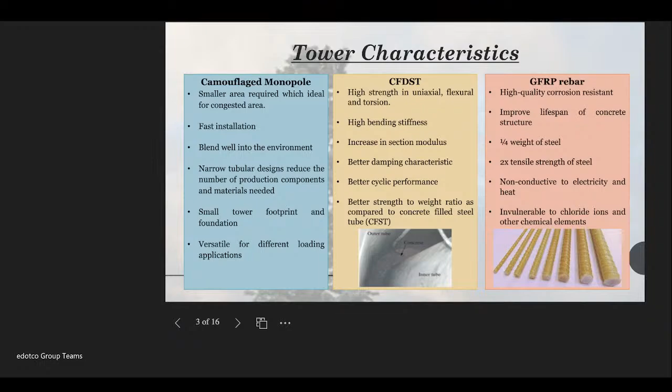Next slide, please. The camouflage monopole is able to blend well with the environment, and installation of the tower itself is easy. By using CFDST, the tower body of the monopole is able to provide high performance in terms of strength. The GFRP bars provide good resistance to corrosion, but also provide 2 times the tensile strength compared to normal steel bars, and are light in weight too.

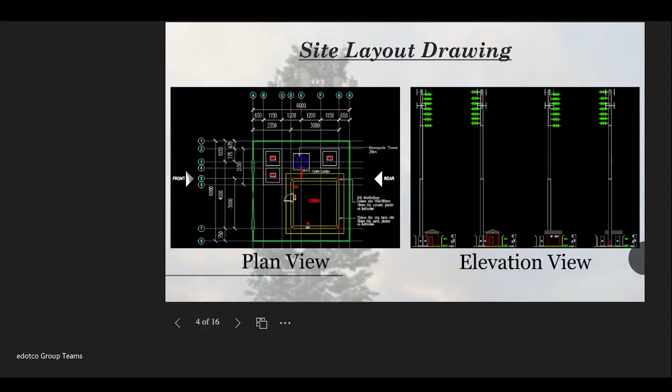Next slide, please. So as we can see here, this is the plan view and elevation views of our tower. There are the cabins, fences, and the towers. And at the elevation views, we can see that they have synthetic branches and leaf at the tower. Next slide, please. So I would like to pass my baton to Yong Liang.

Thanks, Jia Liang. Next, I will continue with gate, fencing, and cabin design. For the fencing dimension, we are using 6 meter times 6 meter with 2.6 meter height and 0.95 meter depth for the fencing footing. All the footings are designed with 2 meter spacing as shown in the figure at left bottom. For gate design, we are using swing gate with dimensions 4 meter width and 2 meter height.

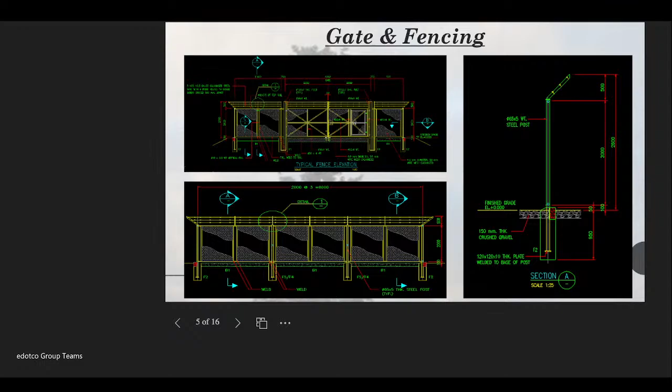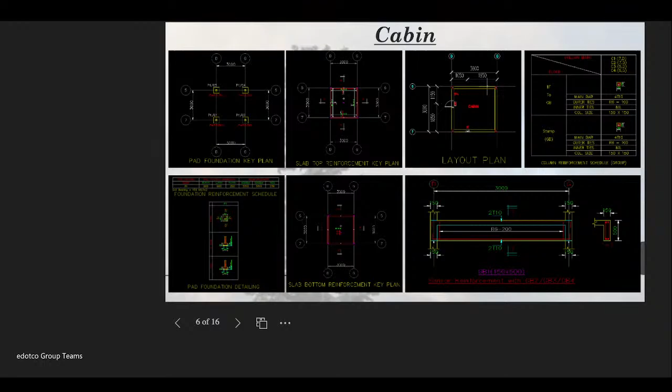Next slide, please. For our cabin design, we are using reinforced concrete design with dimensions 3 meter times 3 meter. The following figure shows the details of pad foundation, slab reinforcement, and beam reinforcement key plan. Next slide, please. In this slide, we show the 3D modeling of the cabin using Esteem and cabin roof truss model using StaadPro.

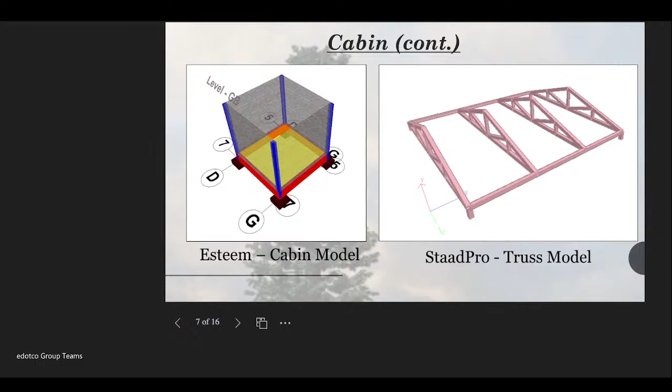Next, I shall pass my speech to Lau to continue the presentation with monopole design.

Now we will look forward into the monopole design. TIA 222G is used as our design code, and 3 CFDST sections are proposed. The first, second, and third sections have lengths of 15 meter, 12 meter, and 8 meter respectively.

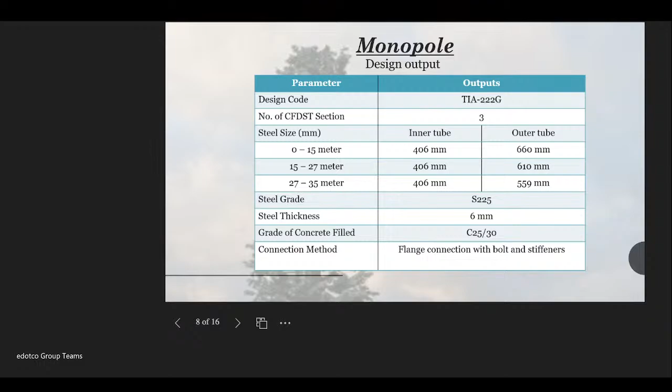All the diameters of the steel tubes are recorded in this table. Furthermore, type of steel grade, steel thickness, grade of concrete fill, and the connection method used in this project are also recorded in this table.

There were 2 doors installed at section 1 and section 3. There will be a ladder installed inside the inner tube.

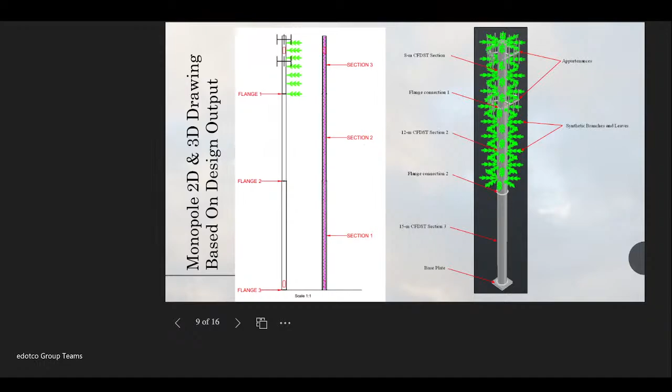Now let's look into the outcomes of the foundation design. First of all, the foundation design requirements are based on the code ACI 318-05. The proposed foundation type is the simple pad footing.

At the same time, we introduce the GFRP bar as the reinforcement. The dimension of footing, concrete grade, and the number of reinforcement are also tabulated in this table. The arrangement of reinforcement is presented in the following drawing.

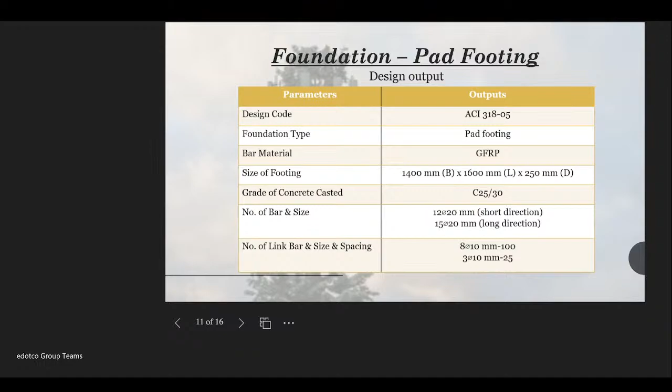From the plan view of the footing on the left, 12 bars are placed in the short direction, which is vertical from our side view, and 15 bars are placed in the long direction, which is horizontal from our side view. Each of them is arranged on top and bottom of the footing.

Look at the reinforcement arrangement in the right figure. 8 bars with spacing of 100 are arranged in the splice with 910 depth, where the rest of the 3 bars are arranged in the remaining splice with spacing of 25.

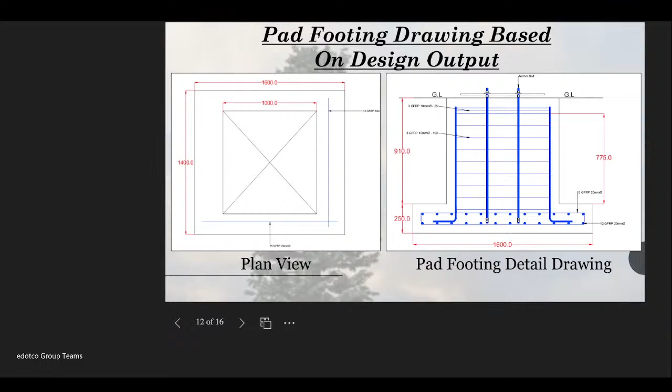Here comes the bill of quantity for the project. There are the BOQ for the foundation and tower.

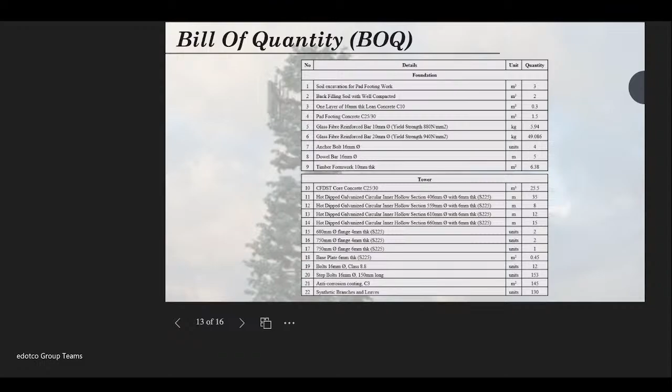Last but not least, this is the BOQ for the cabin and mortar.

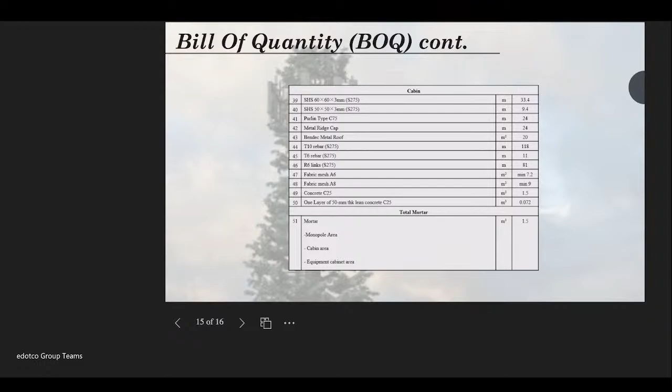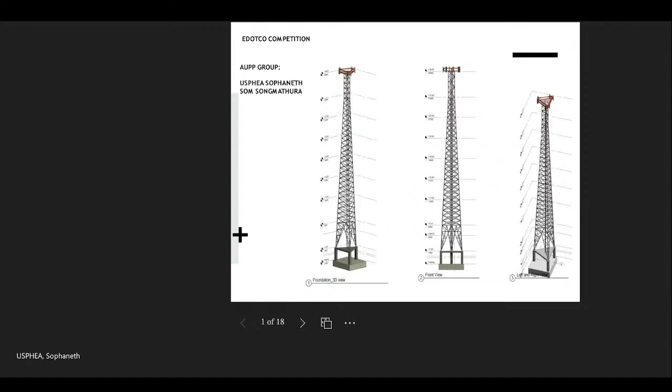Here's what we're going to talk about throughout the presentation. First, we will briefly talk about our technical design, for example how we did the project or how we came up with the design. Secondly, we'll talk about the material for our cell tower. And last, we will cover the benefits of our design to the environment, society, and to edotco's business operation as well. But I will only spend a little bit on technical design, and if you want to look at more, you can see our report. Since our time is limited, I will spend the rest on material and benefits.

So let's start. How did we design the project? Actually, we used two different approaches. First, we did the basic design with our hand calculation for beam, column, and member. But then we used software to verify our data. We used two different software: design tower and robot structural analysis to do the analysis of the tower, and we used Revit structure to do the shop drawing in 2D and 3D.

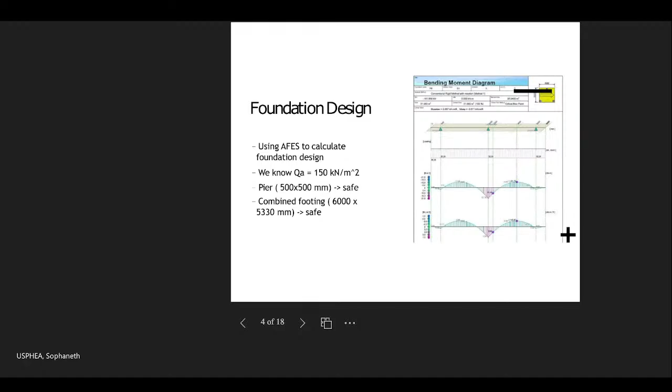Here's the result and major takeaway. We conclude that our foundation and combined footing itself, and the reinforcement of our foundation, are within the limit of requirement as well. The pier design is also working well without any error. We used RisaTnx as our main calculation since it has all the code requirements.

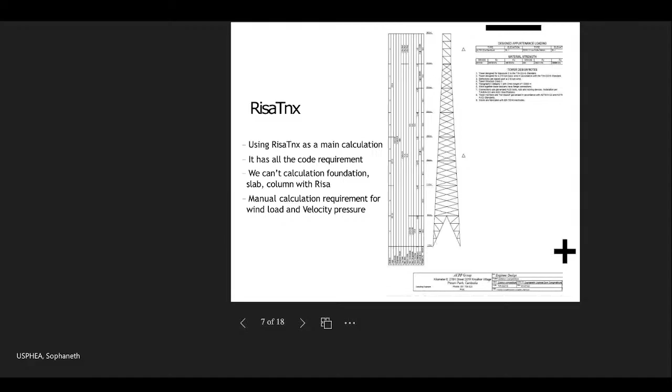However, there are still some limitations to this software. For instance, it can't calculate the foundation, slab, column, or ladder. That's the reason we introduced the second software called robot structural analysis, to fill the lack of RisaTnx. The result of both calculations is slightly different, since in robot structural analysis we include the dead load and live load of the slab, dead load of the foundation, and column and ladder as well. That's why the result in robot structural analysis is higher than in RisaTnx.

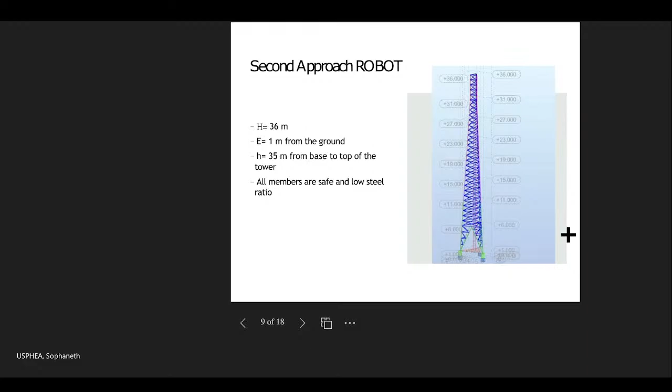I already included the result in my report as well. So of course, we can say that both of the designs are the same. Our structural integrity is fine. And now let's move on to the second section.

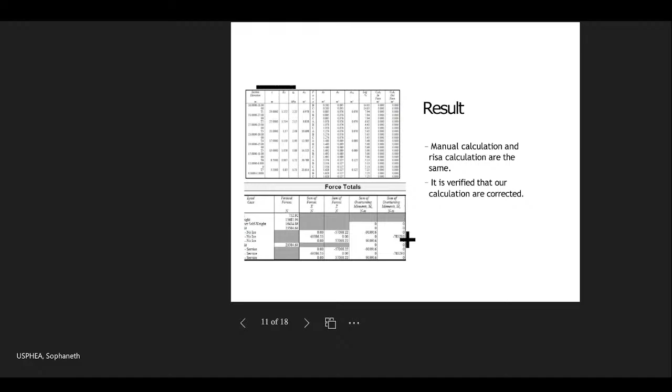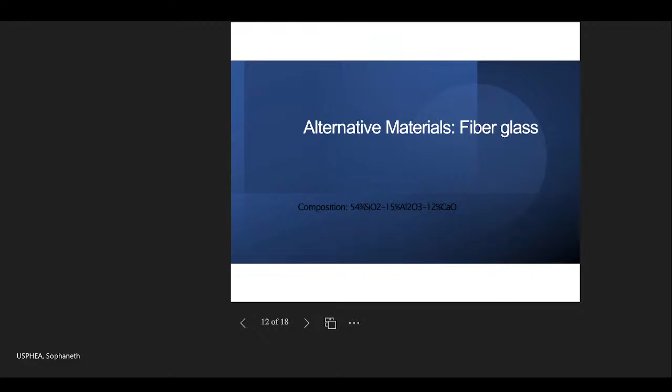At first we considered many materials for our design. We considered carbon steel, high carbon steel, engineering timber, but finally we decided to go with fiberglass after a long period of intensive research regarding this material. This is all the main properties of the fiberglass.

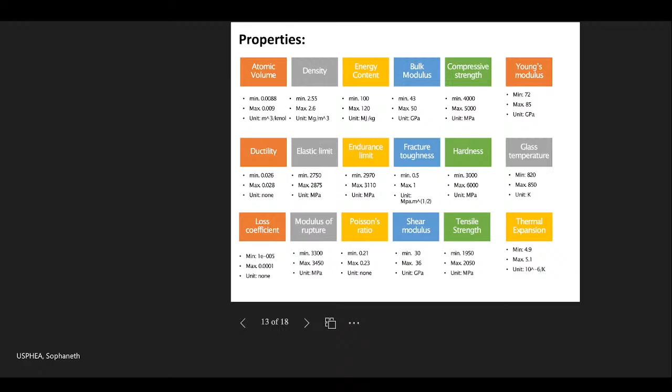I won't go through all of that one by one. I'll just summarize that the strength of fiberglass is that it has more durability than steel and wood. So let's start with the application of fiberglass.

Just a side note, fiberglass is not a new type of material. It has been experimented with for a long time already, and its application has improved day by day. Many material scientists believe it will completely replace steel in the construction industry in the future.

For instance, there were several case studies. We have Dr. Steinberg and Dr. Johnson, co-authors from the University of Arizona, Tucson, who did a study on the structural analysis of a fiberglass antenna tower. This paper is really wonderful, and according to my research, it proved that fiberglass is a really good material for the next generation of towers.

Dr. Steinberg and Dr. Johnson wrote that the use of fiberglass provides a design that not only met structural requirements but eased transport, simplified erection, and improved maintenance. So fiberglass can replace steel because it is better and, most importantly, it meets the structural requirement.

Moreover, the Ohio Department of Transportation stated that unlike steel rebar, fiberglass rebar doesn't rust, so the concrete deck structure doesn't degrade as quickly, increasing the longevity of the structure. Plus, composite rebar is lighter, so it's less expensive to deliver and faster to install.

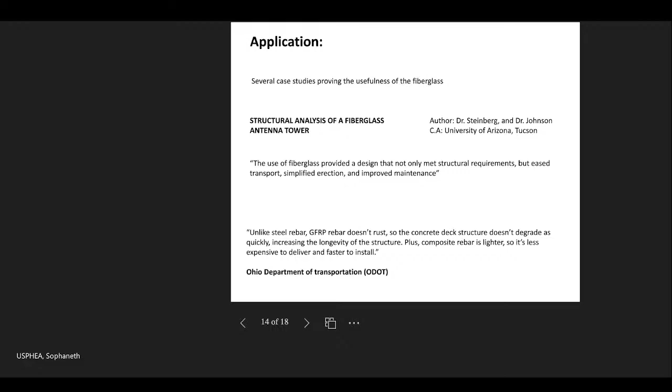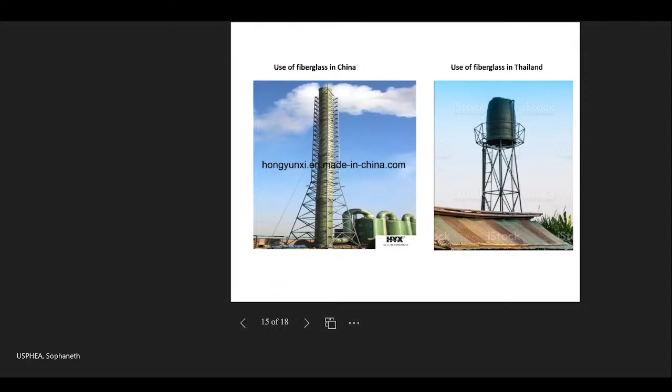There are several more cases regarding fiberglass, but I won't cover all of them. This is the real application of fiberglass in China and Thailand. I can see in Cambodia that fiberglass has become widespread in the form of scaffolding that has been mass produced by China.

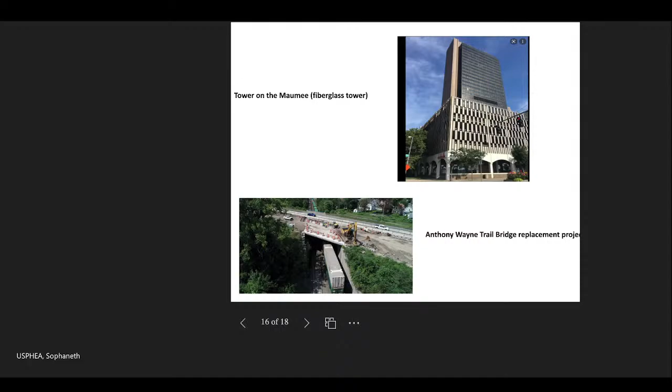The lower left is the Anthony Wayne Trail Bridge Replacement Project. First of all, the bridge was made of steel—steel rebar and a steel bridge—but they did a replacement project with fiberglass, and the result is also better than steel.

So let's move on to the last section. First, fiberglass is a natural choice when you are seeking energy efficiency and a green, sustainable solution. Due to its composition, fiberglass is known for very low total energy produced. Sustainability starts with sand, an abundant natural resource.

The main ingredient in fiberglass is glass. Since glass is made from sand, an abundant, natural, non-depleting resource, fiberglass is a highly sustainable solution. The second benefit is energy saving—as mentioned, the manufacturing of fiberglass is a far less energy intensive process compared to many other construction materials.

However, there are plenty of other ways fiberglass can help with energy consumption. For one, fiberglass features terrific thermal insulation. It has thermal conductivity that is 500 times less than aluminum.

One of the most notable points is that fiberglass has a lesser carbon footprint than most materials, making it eco-friendly. If you compare it to steel or concrete, it only releases half the emissions of concrete and a third of those of steel.

Fiberglass lasts longer than most materials since it has a really high tensile strength, and it is resistant to most substances such as acid-based oxidizing agents, so it won't easily rust. I think this is important for our tower.

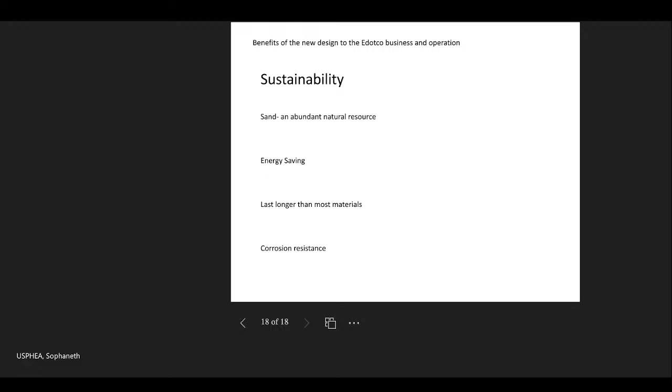So you were saying we can use this in the foundation as well, right? As a replacement for rebar — am I understanding correctly? Yes, we use it. Okay, so if we do that, by how much do we reduce the weight of steel in the foundation, and how much would we reduce cost versus a standard foundation?

But in terms of spacing, is the diameter of the GFRP the same as normal reinforcement? Because from the calculation it looks quite similar. Yes, it's really similar to each other in terms of properties. But one thing is that it has a lot more tensile strength over steel — in terms of tensile strength, fiberglass exceeds steel by a lot.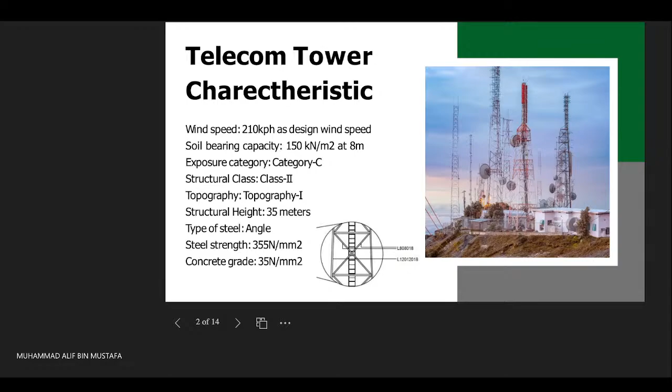So this is our telecom tower idea. First idea is self-supporting tower, which is 5 meter on top, which is vertical straight structure. This is to reduce steel, and secondly is a raft foundation to reduce differential settlement of the soil bearing, because the soil bearing is strong enough to support the loading, but the wind speed is too high, which is, if I'm not mistaken, 58 meters per second or 210 kph.

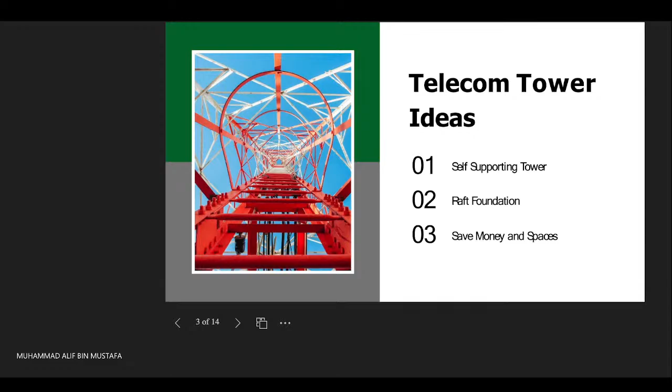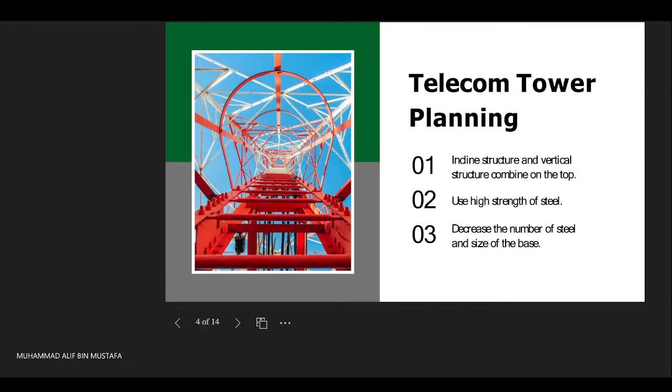So we need the raft foundation to support all the loading, and another reason is to increase the structural stability. All of this idea, I think, saves money and spaces. The telecom tower planning is inclined structure and vertical structure combined on the top, like I said before. Secondly, we use high steel strength instead of GFRP because GFRP is very stiff and not easy to bend, so we choose steel because the structure is too high.

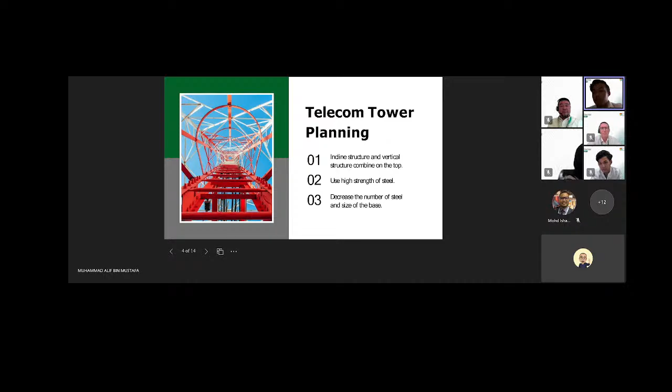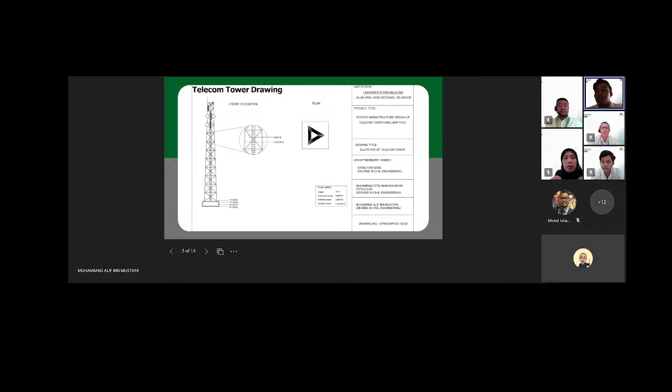It might fail if we use GFRP. So third planning is to decrease the number and size of steel for the base. Also, this is our drawing, where all the details are shown, and this is our stakeholder that's involved in this telecom tower. So move on to the next slide. I will pass to my teammate Fitri.

Thank you. So I will continue about our lamp pole design. First of all, this is our lamp pole characteristic based on the technical framework, and we decided to use steel strength of 275 Newton per millimeter squared, and the concrete grade for the base is 35 Newton per millimeter squared.

So for our design lamp pole idea, first of all, we are going to use solar energy as a power source, and then it will lower the power consumption, and for sure it is eco-friendly environment as they are energy efficient and low maintenance.

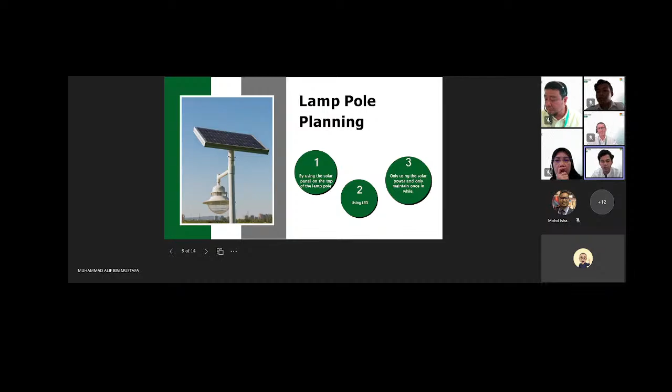So for the lamp pole planning, first of all, we are going to use a solar panel on top of the lamp pole to absorb the sunlight, so that it can generate electrical energy. And then we'll be using LED. By using solar power, we only need to maintain it once in a while.

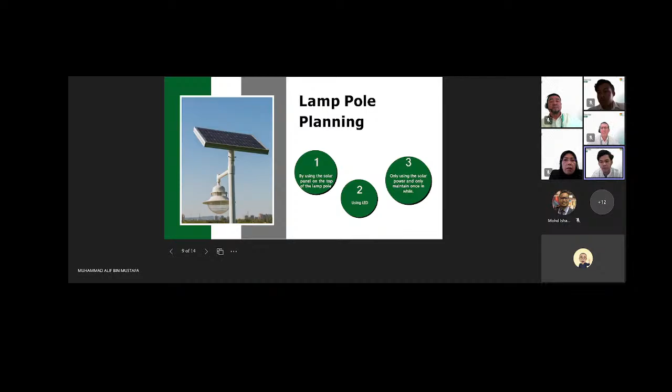So these are our detailed drawing of the lamp pole. And these are the parties that will be involved for the lamp pole design.

So what is the impact to edotco and business information? First of all, our design will be budget friendly, and due to sustainability, it can decrease the manpower as there will be less maintenance needed, and for sure our design promotes a safe environment. So it will build trust with the customers, and last but not least, it will allow the company to grow.

So for conclusion and recommendation, why is our design sustainable? This is because for the telecom tower, it is a self-supported tower as stated by my friend just now, with a raft foundation, and for sure it saves cost and space.

And for the lamp pole, it uses solar energy as a power source, so it will store electric energy in the battery, and then during the night it will switch on the light. For sure our design has low power consumption, and it is eco-friendly as they are energy efficient and low maintenance. I think that's all from us. Thank you.

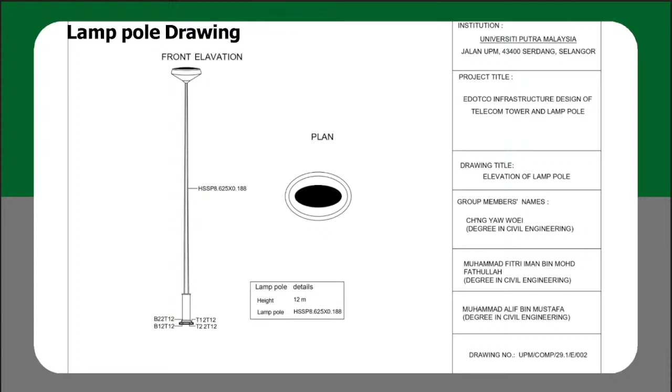All right. Then you need to consider again your pole size, because of the load that you put. The battery is not a light structure, it becomes heavier on top, and the design will be slender on top. So I think maybe you need to consider the sizing of the pole itself to accommodate the load of the battery, since you put it on top.

Yes, we have considered it in the analysis. We use steel, not GFRP, so the steel might help a lot when we install the battery on the top. Okay. Thank you.

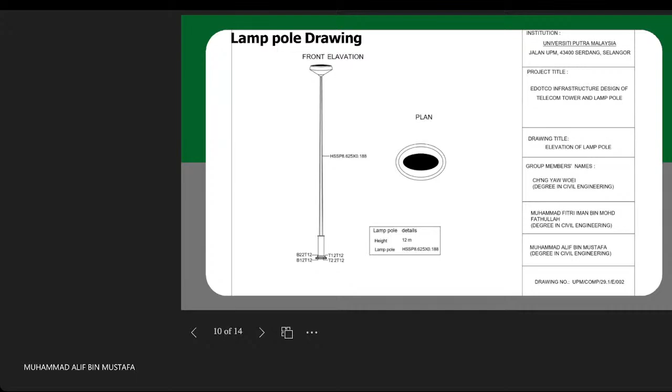How do you place the solar panel? Is it horizontal, or do you have any angle, because there is a certain angle at which the solar panel can catch the maximum energy from the sun? How do you place it, horizontally, facing the sun depending on which side? We place the solar panel on top of the lamp pole horizontally on the oval shape.

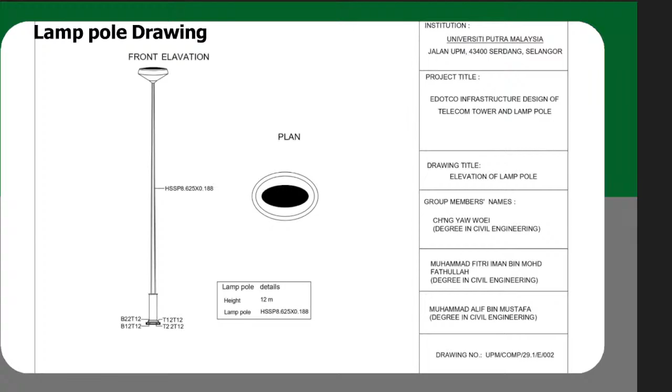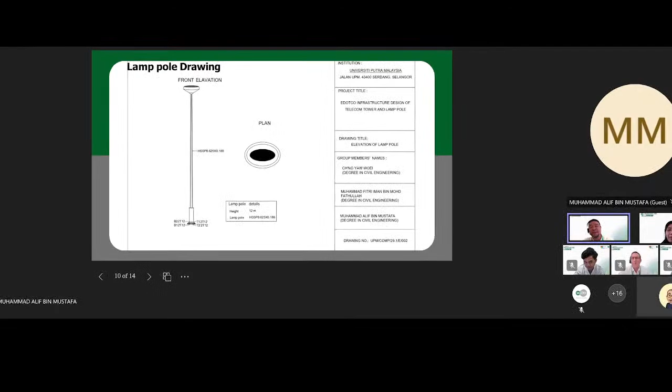Okay, I agree. Certain angle you need to maintain to get the maximum of the sun ray, because at certain times, certain months, the angle of the sun will change periodically per season — that one you need to consider as well. Also for urban areas, shading as buildings go up, you have to be very mindful of that.

Okay. Okay, thank you.

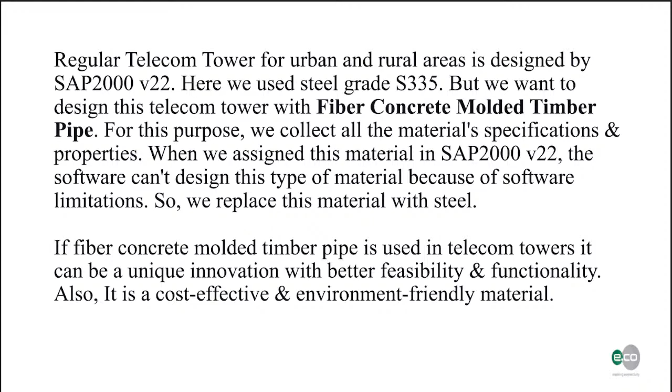Sir, please again. Okay, sorry. I would like to understand the fabrication process of this concrete molded timber solution versus the fabrication for steel. I think it's pretty obvious how that's been done. I just want to understand the process of fabrication.

It can be locally fabricated. The method, maybe you can just explain to me the method, the raw materials that they get, maybe just roughly the method of fabrication. Firstly, the timber pipe is taken, and then it's fabricated with concrete.

Okay, there's no special molds that need to be created for this process, and as for the special wood, or can you just take any type of timber, and the concrete strength, maybe do you have some of that information? Sir, no sir, at this moment we have no information about it.

Okay, thank you. Just now you did mention about the fiber concrete molded timber pipe that you use in your design, but can I know what is the material properties of this? Compressive strength is 38.2 MPa. Fiber, sorry again? Compressive strength of fiber concrete, yeah. 38.2 MPa, and fiber used as a polymer, 3%.

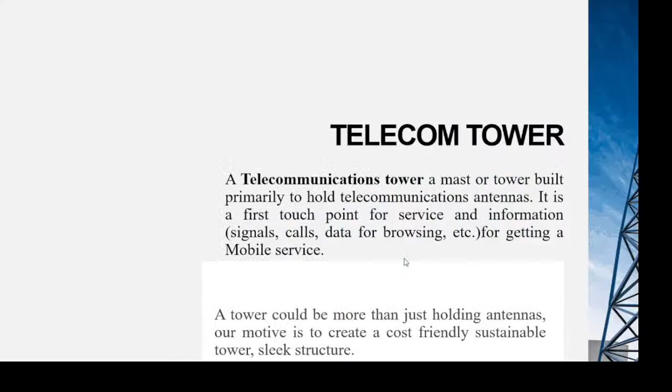When we talk about this material, it very effectively reduces air pollution from lightweight thermoformed plastic panels, a standardized system for interior and exterior application, semi-customizable to project conditions, and an innovative eco-friendly product. This product would certainly be used in densely populated areas where air pollution is high, and when applied to the tower, this material would itself act as an eco-friendly entity, converting harmful air—nitrogen dioxide, sulfur dioxide, or other harmful particles—into neutral air particles.

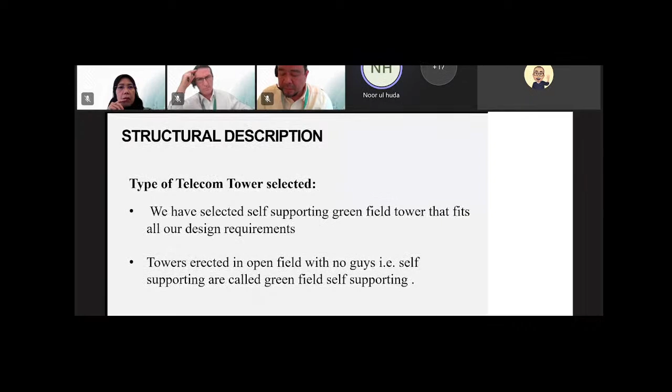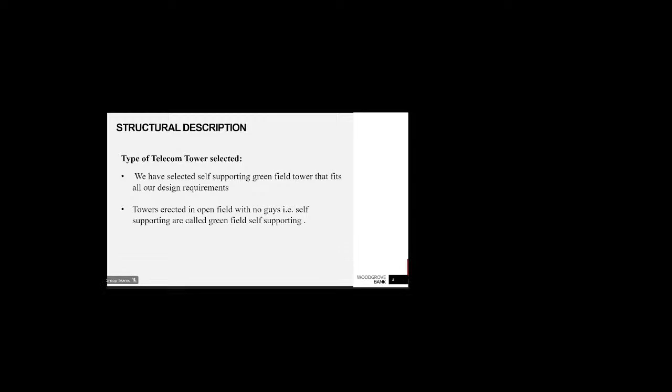Hi guys, from now I will tell you about the structural description of this tower. The type of telecom tower we have selected is a self-supporting greenfield tower because that fits all our design requirements. Page number 9, sir.

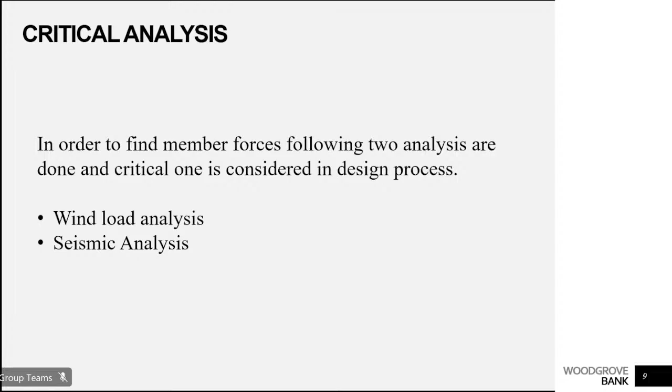In order to find the critical member forces, we have done two types of analysis here: wind load analysis and seismic analysis.

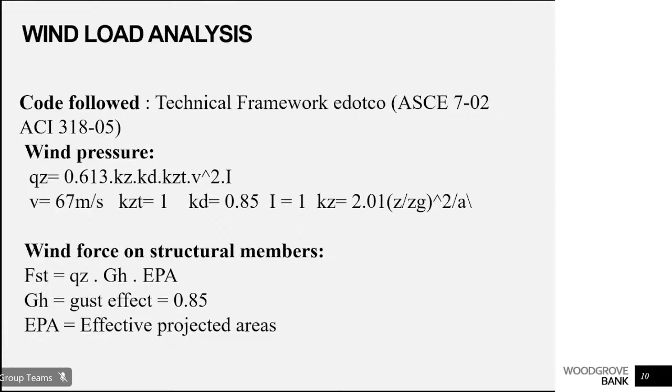Very good afternoon, very good afternoon, esteemed judges for today's competition, ladies and gentlemen.

Very good afternoon, esteemed judges for today's competition, ladies and gentlemen. First and foremost, I would like to thank you for tuning in to the closing ceremony of our... very good afternoon, esteemed... very good afternoon, esteemed judges for today's competition.